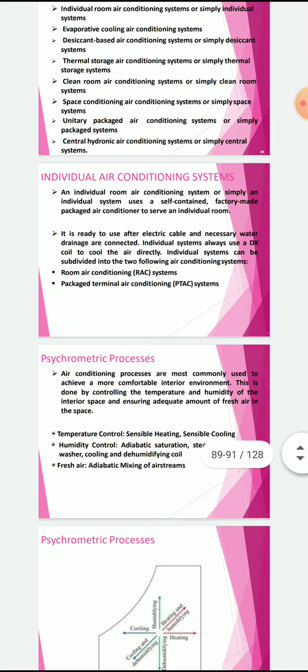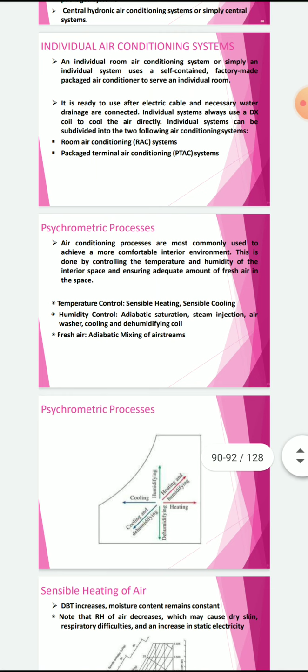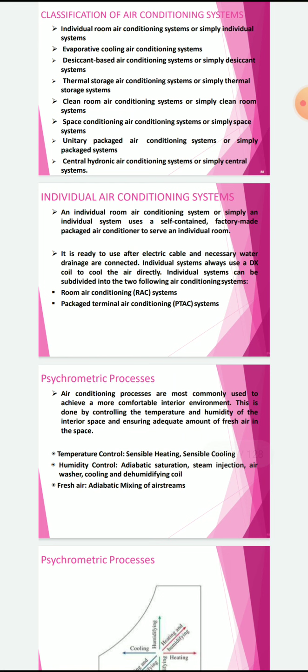Through various psychrometric processes, air is to be conditioned. For conditioning air, we require to maintain temperature, humidity, and quality of the air.

Temperature is maintained either by heating, sensible heating, or sensible cooling. Humidity is maintained by using humidifiers or dehumidifiers. And the quality of air is maintained with the help of addition of adiabatic mixing.

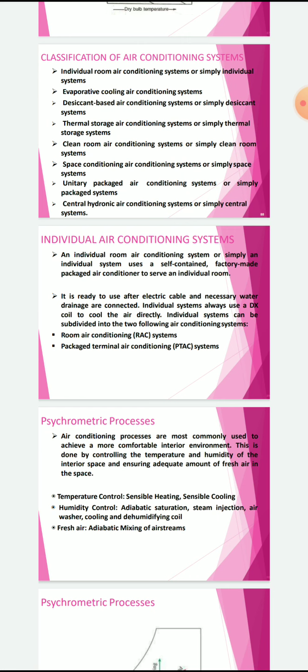Say 20% of fresh air is added to the main streamline, 20% is removed before we send the air to the chillers, and another 20% of the fresh air is mixed adiabatically - we call it adiabatic mixing - and it can be achieved with the help of some psychrometric processes.

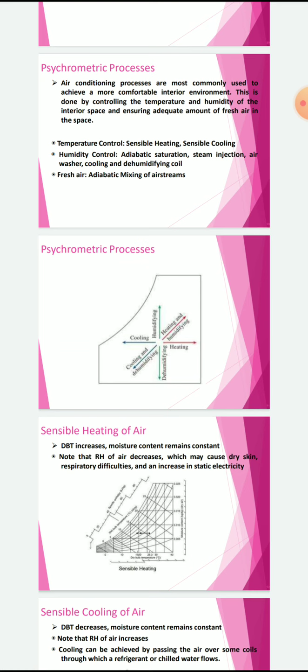Psychrometric processes: sensible heating, sensible cooling, heating and humidification, cooling and dehumidification, humidifying, dehumidifying, cooling and humidification, heating and dehumidification. All these processes help us to maintain air.

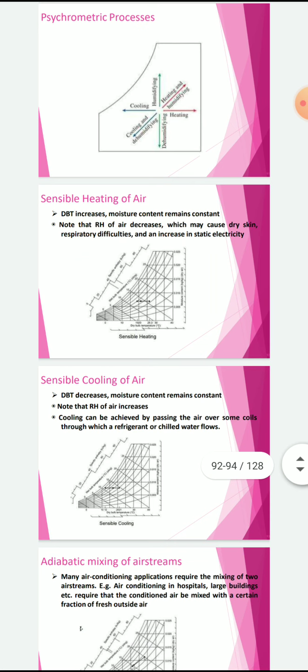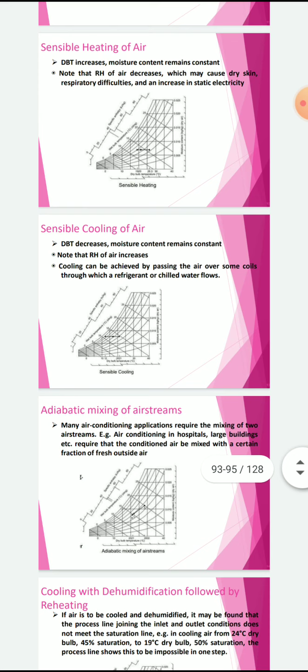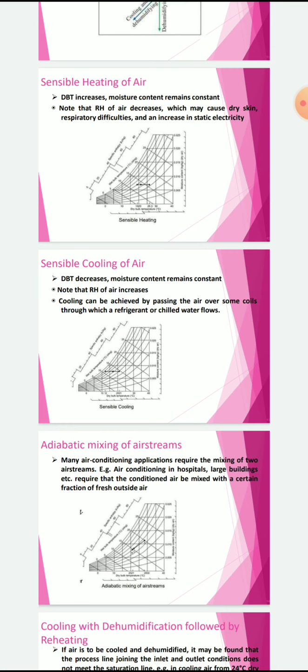Sensible cooling and sensible heating only affect the dry bulb temperature. Increase in dry bulb temperature is sensible heating, and sensible cooling is decrease in dry bulb temperature (DBT). Adiabatic mixing of two streams leads to change in a lot of factors.

Temperature, humidity, and purity - of course purity will increase, temperature will get disturbed, humidity will get disturbed, and to maintain it again we require air conditioners for humidification and for decreasing temperatures.

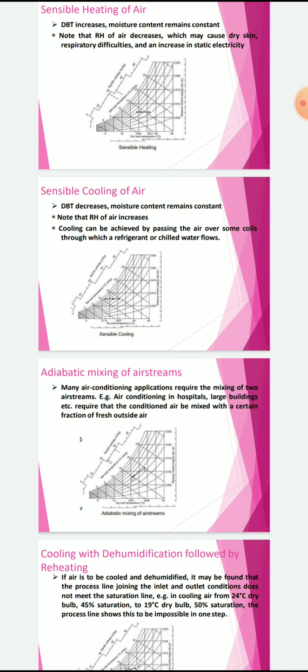Cooling with dehumidification followed by reheating. Cooling with dehumidification followed by reheating.

Dehumidification is done by cooling. Simply you cool the atmospheric air in a room. We'll find the air reaches dew point temperature, and at that temperature you will find the formation of dew, which can be removed with the help of dehumidification. We call it dehumidification.

To increase the temperature, dehumidification is done first. To increase the temperature we require reheating. So if air is to be cooled and dehumidified, it may be found that the process line joining the inlet and outlet conditions does not meet the saturation line.

Example: in cooling air from 24 degrees Celsius dry bulb, 45% saturation, to 19 degrees dry bulb, 50% saturation, the process line shows this to be impossible in one step. That is the reason why first cooling is done, dehumidification takes place, then we can increase the temperature by heating. Humidity remains the same.

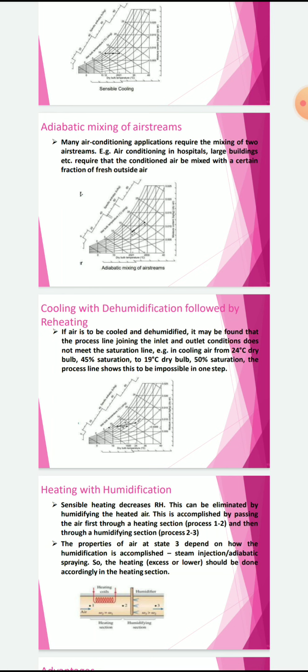Next process: heating with humidification. Sensible heating decreases relative humidity. This can be eliminated by humidifying the heated air. This is accomplished by passing the air first through a heating section, process 1 to 2, and then through a humidifying section, process 2 to 3. The properties of air at state 3 depend on how the humidification is accomplished.

Steam injection or adiabatic spray - the heating in excess or lower should be done accordingly in the heating section. The properties of air at state 3 depend on how the humidification is accomplished, by steam injection or adiabatic spraying, so the heating should be done accordingly.

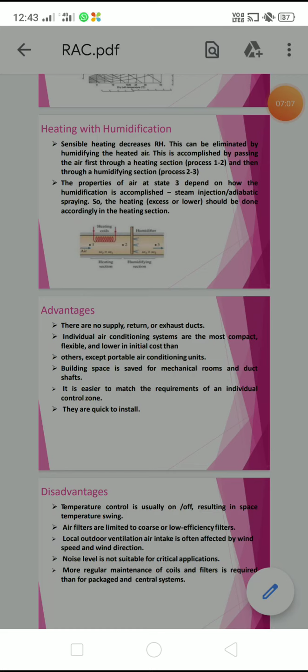Heating with humidification: sensible heating decreases RH, relative humidity. This can be eliminated by humidifying the heated air. So we need to humidify - of course we are heating, but we need to increase the relative humidity, and for that we require humidification.

This is accomplished by passing the air first through a heating section and then through a humidifying section. The properties of air at state 3 depend on how the humidification is accomplished.

It can be done by using steam injection or adiabatic spraying. Take a chamber - in a chamber you can use some water sprayers. Allow the air with some velocity from one direction to the other; in one place it will heat, and in the other chamber it will humidify by spraying. So humidity in the form of small droplets gets added to the air.

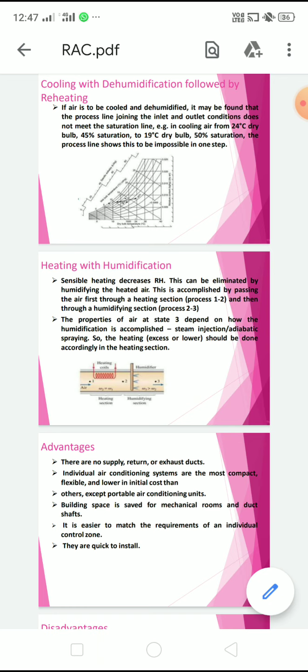Now coming to the advantages: there are no supply, return, or exhaust ducts. With the help of heating and humidification systems, you won't require return ducts, exhaust ducts, or supply ducts - only a simple, direct, one-way route. Individual air conditioning systems are the most flexible and lower in initial cost than others, except portable air conditioning units.

Building space is saved for mechanical rooms and duct shafts. With individual air conditioning systems, we don't require mass production of conditioned air to be supplied to all rooms. It is not required, because only the independent rooms have that setup, so we don't require separate maintenance or observation of mechanical rooms where the conditioned air is produced.

It is easier to match the requirements of an individual control zone, and they are quick to install. Because there's no large setup, it's only a simple and easy setup, so it won't require much time for installation. They are quick to install, maintenance is low, and easy to operate. So like that, we have many advantages.

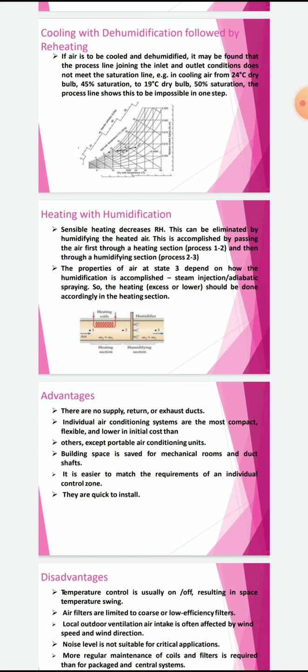Coming to the disadvantages: temperature control is usually on-off, resulting in space temperature swings. Air filters are limited to coarse or low efficiency filters. Local outdoor ventilation air intake is often affected by wind speed and wind direction.

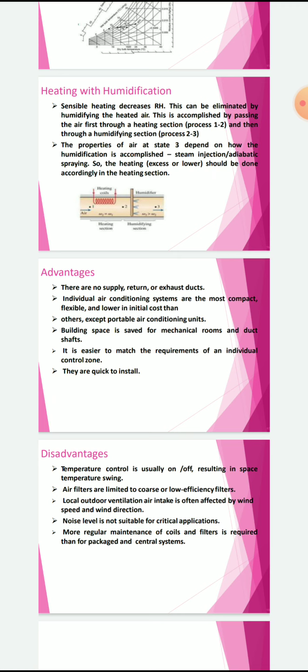Noise level is not suitable for critical applications, because it is independent and we need to set up our mechanical setup within the independent room - that's why it creates noise pollution. More regular maintenance of coils and filters is required than in packaged and central systems, so more care is to be taken. That is the final disadvantage of individual systems.

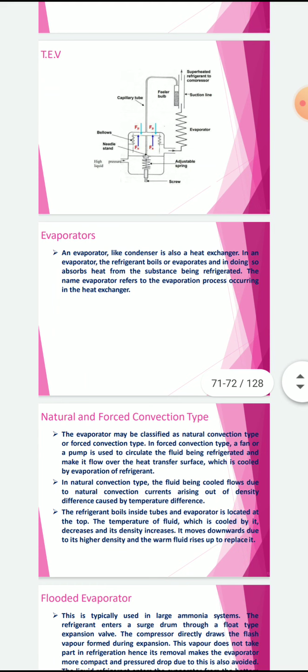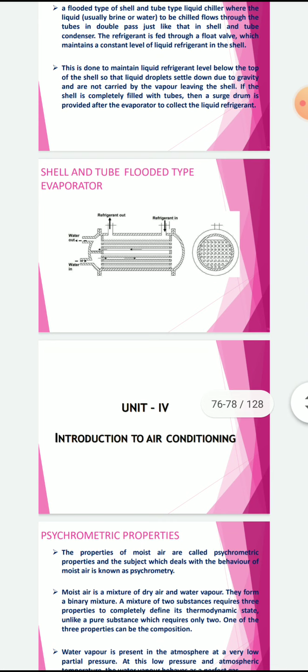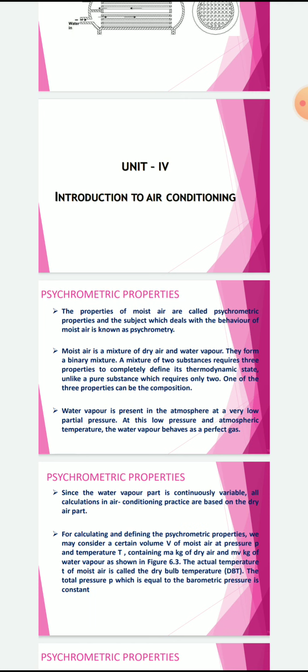It is easy to score in this subject, and it is very important for upcoming trends because everywhere refrigeration and air conditioning is required - it is a must. For that purpose, it is very important and essential to learn this subject. Refrigeration is done only to maintain the temperature of a given space lower than atmospheric temperature.

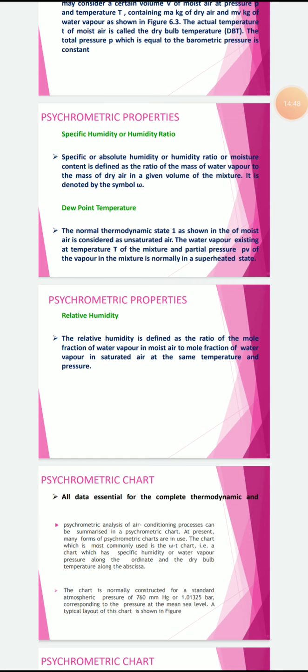Suppose our ordinary refrigerated area - the temperature of that space is less than atmospheric temperature. This is only done because of the refrigerator. But to maintain humidity and purity of that room, we require air conditioning. So air conditioning includes maintenance of temperature, maintenance of humidity, and quality of the air. Therefore, refrigeration and air conditioning is an important subject to learn for the future.